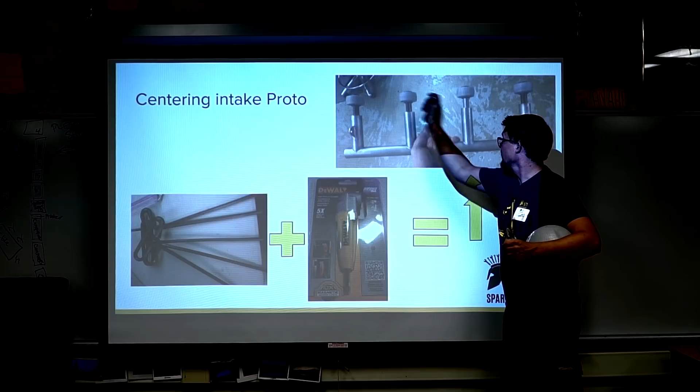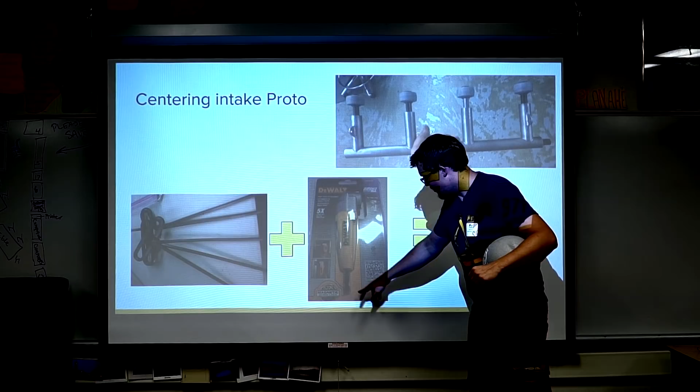The attempt was essentially roller, roller, roller, roller. I wanted these 2 spinning that way, those 2 spinning that way, and I wanted 1 motor to power all of it. So what I ended up doing was I bought some DeWalt right angle drives, which are just commercial off-the-shelf little things meant for getting screws in tight places. And that happens to have a 1/4-inch hex input and a 1/4-inch hex output. Already made for you. So I find out if I pop this apart, there's 2 little bevel gears in there with 1/4-inch hex through them.

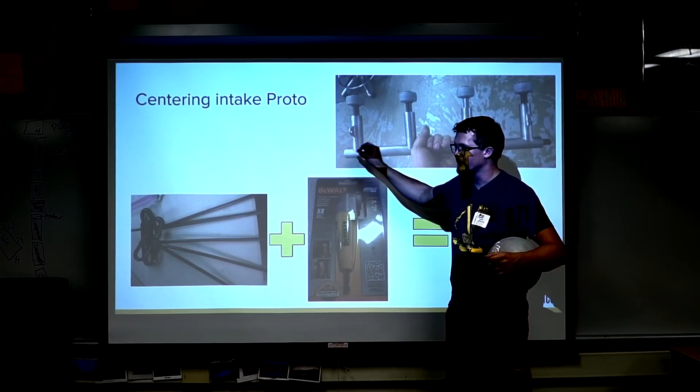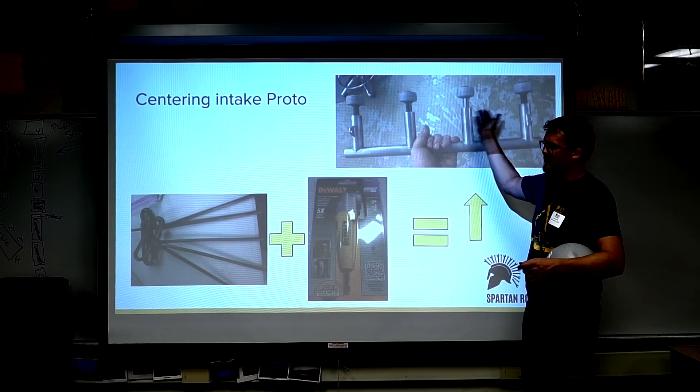So between those and those Allen wrenches, I was able to have 1 single back shaft that comes along this entire tube, and then 4 smaller stubby shafts, and then bevel gear set, bevel gear set, bevel gear set, bevel gear set, and I turn 1 axle at the end, and this is a piece of 1-inch steel tubing actually. So I was able to have 1 motor turning that, and this all runs. And it doesn't really take up much space, very tiny, very durable, because it's just thin wall steel tubing.

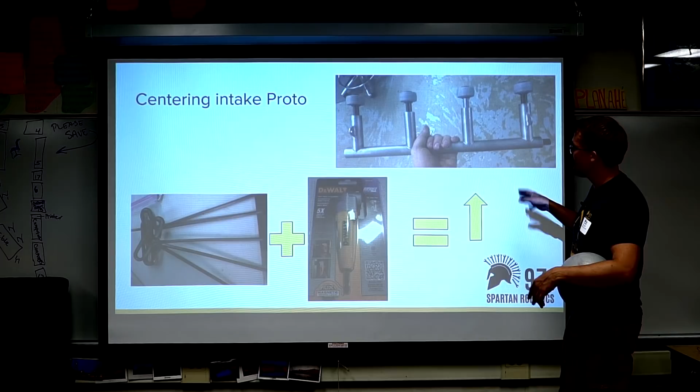This was a prototype that was pretty close to working, but it was too aggressive. It would take the ball, suck it to the middle, and then start spitting it out the bottom, just mushing it out the bottom. So that was kind of annoying to deal with. We ended up actually not using it at all and switching to a printed spiral roller and letting the ball rotate, which is much more similar to the vectored intake wheel setup this guy has.

But it was basically a creative application of off-the-shelf components as far as product availability. The NASA Lunar Mining Competition thing I mentioned earlier, we had one instance, it was a couple days before leaving for competition. We were doing some testing, and we had a 7075 1/2-inch hex axle just bend on us. And it was a more significant cantilever than we would have liked, but our options were limited, and we couldn't find where to buy any 4140 hex, a steel hex, anywhere.

But we ended up at a hardware store wandering around grabbing some tools before leaving on our trip down to Florida for the competition, and another teammate pokes me on the shoulder and says, "Hey, you know where you can get some steel 1/2-inch hex?" and points at the shelf full of the giant 1/2-inch T-handle Allen wrenches. And it's like, okay, you're right. And then went and made an axle real quick out of an Allen wrench. And zero problems, worked great.

All right. So looking for existing things, like, industry has solved many things for you and also has made many things available in further along states than just raw material. And that's an example of applying some of that. So some of you saw me driving around a silly little go-kart earlier. This was actually a thing I did for the very first one of those I made. I wanted to have a 2-speed. And part of this, that competition has you operate at a $500 budget, so you need to keep track of what you do use.

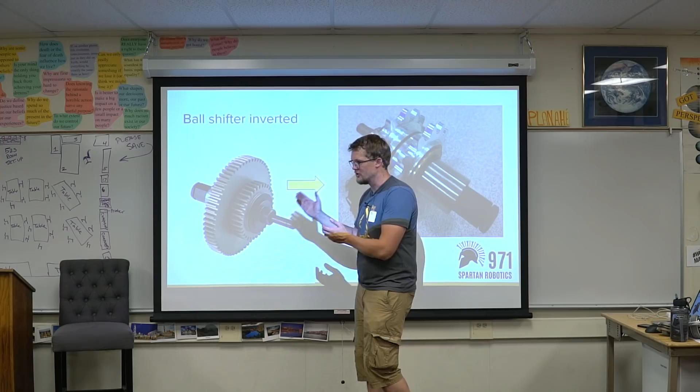But the product on the left is a thing I actually helped develop at Vex as a ball shifter cluster. So it's part of a standard off-the-shelf 2-speed ball shifter. So how this works is there's a central plunger, and then there's a set of balls that engages this gear, or you push it and it engages this gear. So you pick between those two. And typically the motor is up above, driving a gear coming down through here, and this is the output of this system. The shaft picks which gear to drive, and that goes down to your drivetrain.

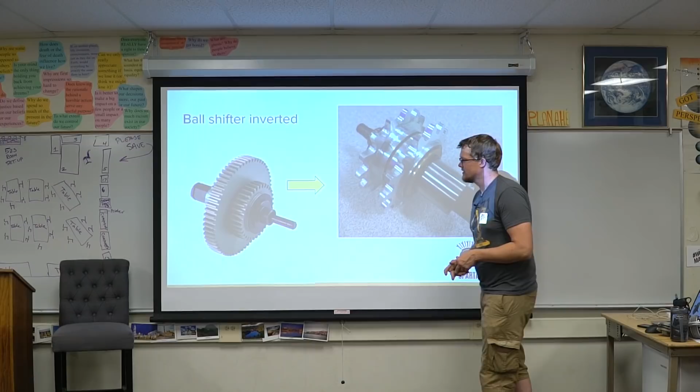In my instance, I wanted to have 2 chain runs going to my back axle, and I could just use a bigger sprocket and a smaller sprocket for my 2 different speeds. Now it was really cheaper to make because I could just machine them myself, or even buying plate sprockets is a lot cheaper. And also more flexible with regards to swapping them out quickly and not having to worry about center distance changes. So in this instance, I took these existing gears, popped them in a CNC machine, and made them sprockets. So I now had a ball shifter shaft where the output was now the input, and I had 2 chain runs to my back axle.

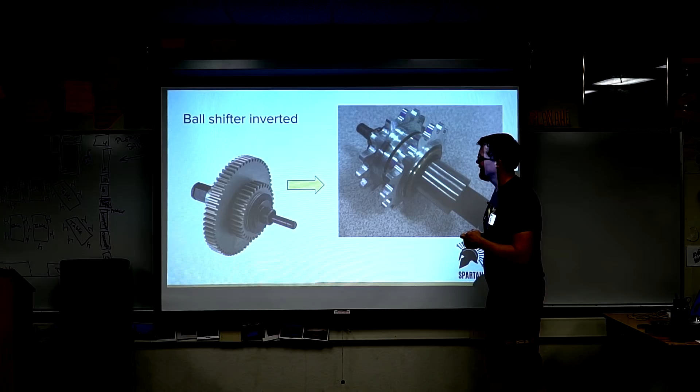And that one actually ended up having some problems with regards to shifting under load, because for FIRST Robotics robots, you are accelerating forward and reverse a lot, so you often have some dwell time, so shifting is not that big of a deal. But when you're accelerating hard and wanting to shift, you need to release that system from load and get things lined up in order to go. So mechanically it was fine, but during actual operation, getting it to engage cleanly at that speed was really hard. So I ended up using a different method I'll get to later. But just another instance of repurposing an off-the-shelf thing as opposed to starting from scratch.

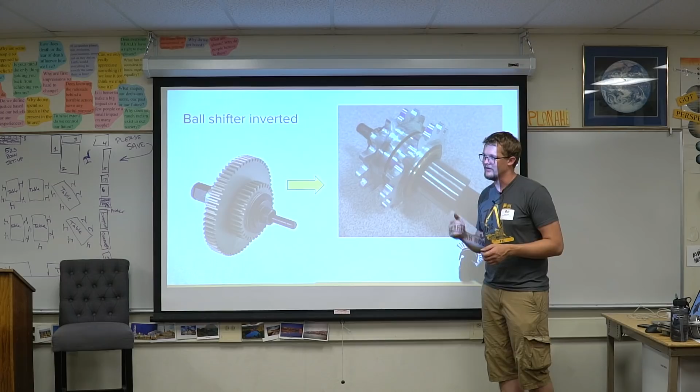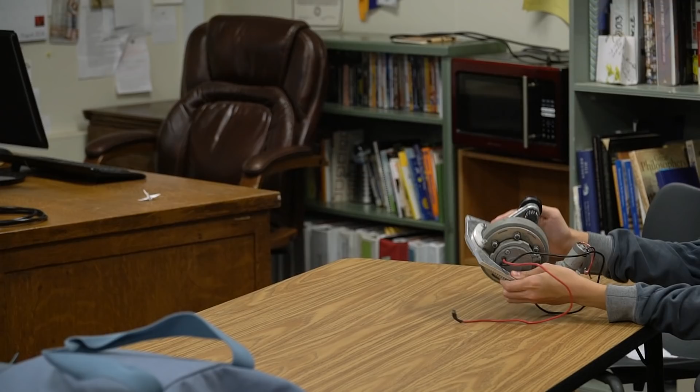I'll pass this one around up here. Play with it. Who knows what a swerve module is? A couple of you guys? So if you get a kit of parts chassis in your kickoff kit, it's a 6-wheel drive tank drive, which is referred to as a differential drivetrain, essentially. Because the output of that system is right side, left side, you have 2 degrees of freedom, and then you get translation and rotation. If you want to drive forward, both sides drive forward, backward, spin one the other way, you spin in place.

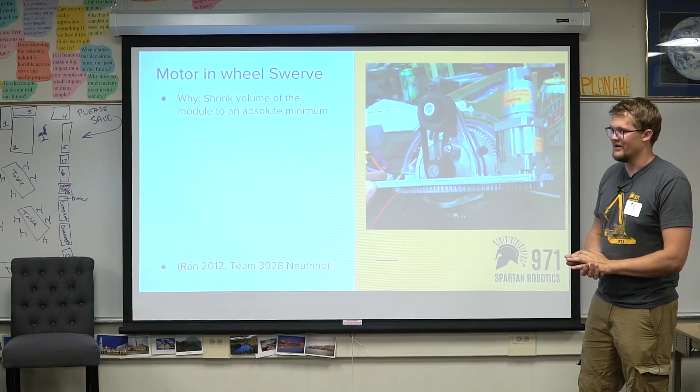In the case of swerve drive, you end up putting some number of these modules on a robot, but all your wheels can turn independently. So you can do all sorts of fun stuff like driving a straight line while spinning, sit there, point sideways, and drive sideways. Lots of options are available. This drivetrain's been around since like 1999 or something, but often it was a fairly bulky assembly that took up a lot of space. And 2012 was the first year of Team Neutrino, so we were rookies actually. And we're stupid and went for something creative and fun and built this module. And I posted this picture on the internet, and it took people a fair amount of time to realize where the motor that drives the wheel was.

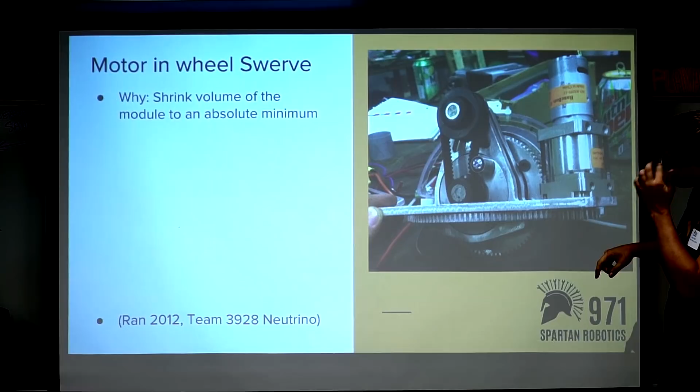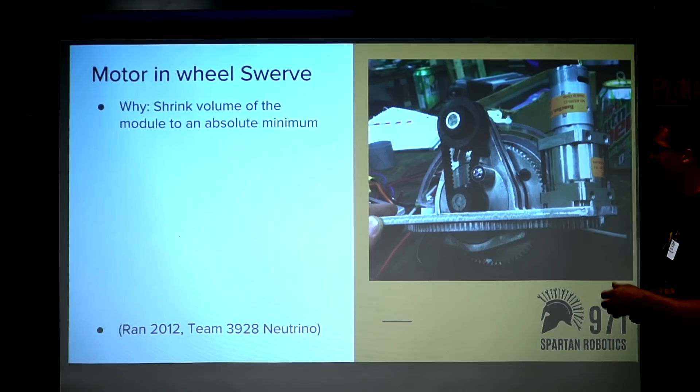And it took people a while to realize that this right here is the exposed face of a CIM motor. But basically what this enabled was everything was much more compact, and there was less stuff, so it also ended up being significantly lighter than many of the other modules. It had its own pitfalls with regards to manufacture, as far as some additional complexity, but it basically shrunk everything, because that robot was actually, I think, 7 inches tall, and for the most part fit underneath the bridge that year, for anybody who's familiar with 2012.

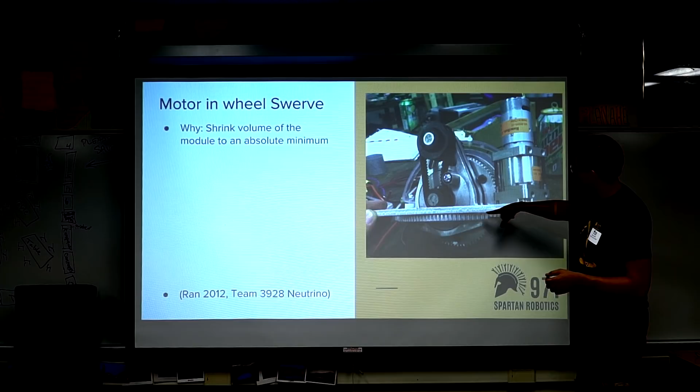But in this instance, there was a CIM driving the wheel, and then a little BaneBots 395 through a gearbox over here for steering that unit. The most creative part of this module to me is not the fact the motor's inside the wheel. It is actually this tensioner.

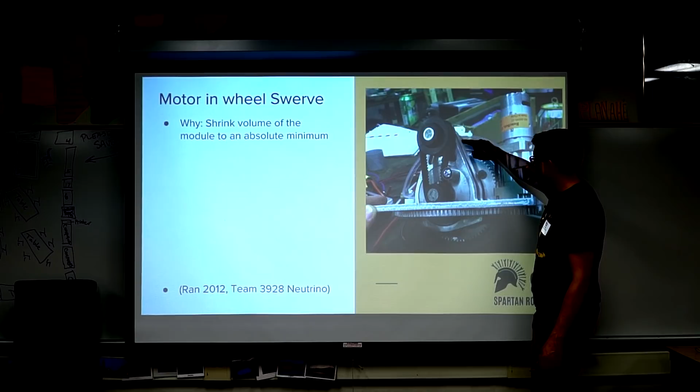So we were faced with a problem. We had a belt run here, and we also had a gear run back behind it that were both in the same center. Gears aren't really flexible. You want them to be at a fixed center, and you can't just adjust them up and down. So I needed to tension a belt, but I couldn't change my center distance spacing, which is what's most commonly done in FRC. So I needed to put a tensioner in from the side of the belt to push on it.

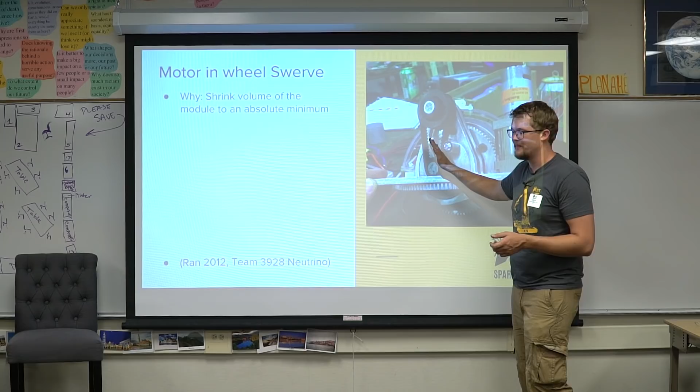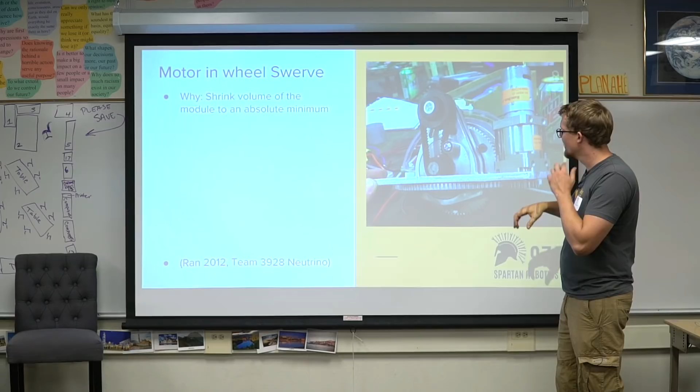So in this instance, we were able to solve this problem by adding a screw and 3 bearings, completely off-the-shelf parts, and the module also had a clamp. So I took one of the standard mounting screw holes in the face of the CIM, put a screw and bearings on it, and then if you look at the back side of the module, there's just a little shaft collar type clamp on the CIM. So you'd loosen that clamp, rotate the CIM until the belt's nice, lock the CIM down, done.

So we were able to get functionality for very, very little. Like, I didn't have to manufacture anything new. There was no extra package out here that increased my swing radius. It was just the simplest little thing, and I think it's easily the most creative part of this entire module.

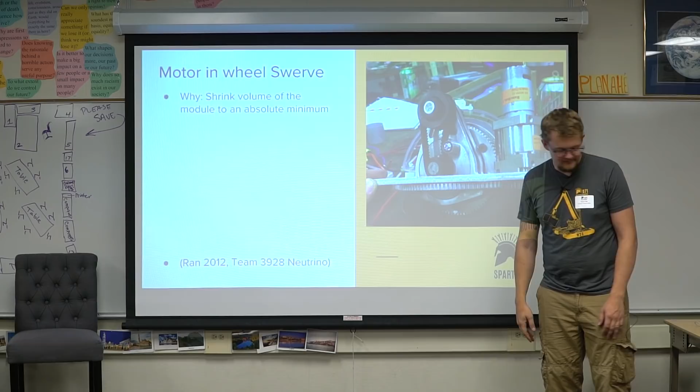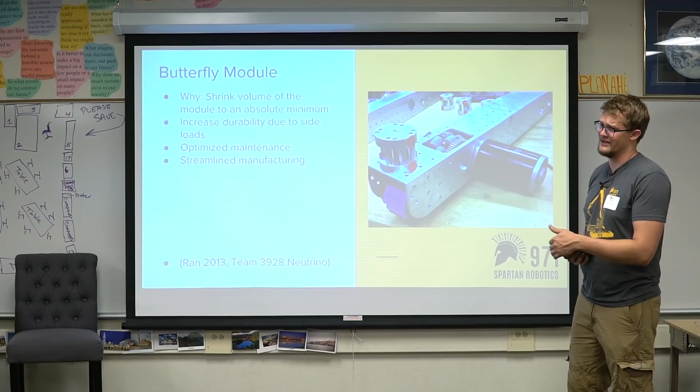So another fun one. I don't know who's familiar with a butterfly drive. Okay, I got one of you. All right, so 2013, the year after the swerve, we went, okay, let's go a little simpler on the drivetrain, but still not what we should do. So let's still do something else fun.

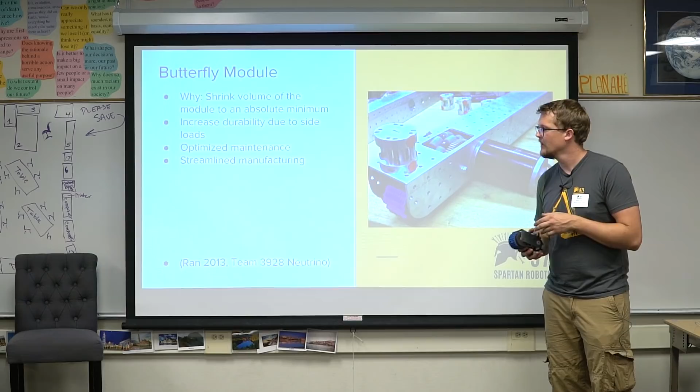A team that I was later actually on, 148 in 2011, did what's known as a butterfly drive, which is essentially 4 omni wheels and then 4 traction wheels, and the ability to switch between the two. We decided we wanted one of these, but the existing modules that 148 had made were very substantial in size and had some durability issues.

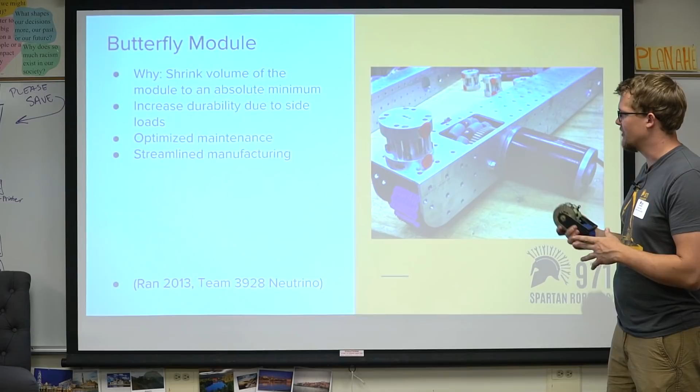So we wanted to make our own, but we wanted to match it to our manufacturing capabilities, which were different than theirs. They had a very advanced sheet metal shop that would crank things out and made it largely transparent. We had a whole lot of manual and some CNC machinery available. We wanted to optimize it for maintenance if it ever needed it, and we wanted to streamline manufacturing to match our expectations. So this module, the creative approach here was essentially, what do I actually need?

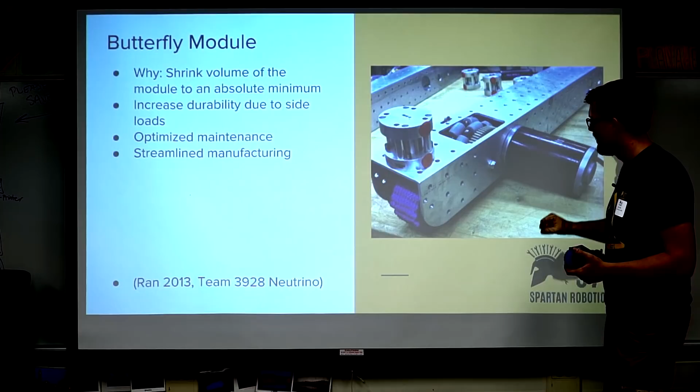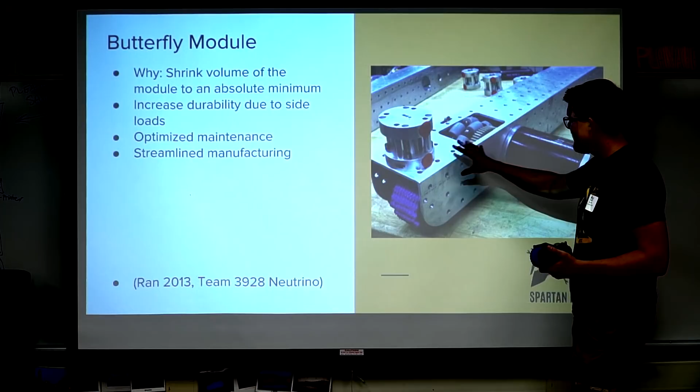I need power for each side, so I had a motor. I had an omni wheel, I had a traction wheel, and I had an actuator to switch between the two. I needed a gear reduction between my motor and my wheel, and I also wanted this guy geared even lower, so in traction mode I had more pushing power. So effectively it gives me a 2-speed too. But if you look at it, you realize if you take any single one of these parts away, the system doesn't work. There's no superfluous parts.

So in this instance, we had to manufacture a lot of parts. All the parts are pretty simple two-dimensional parts, nothing crazy. There's one more fun part here with CNC because we could and had the ability to.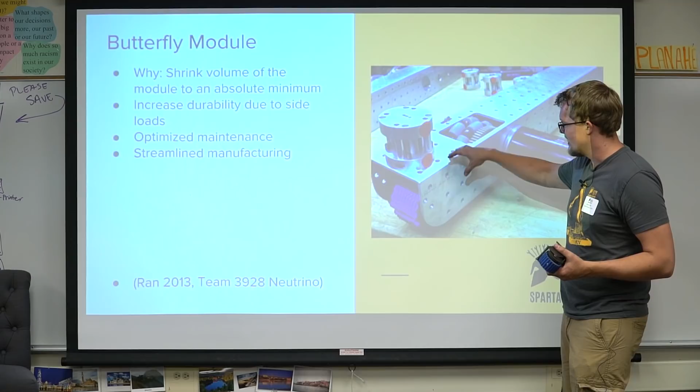But we also managed to take this whole thing and house it inside a piece of 3x3 tubing, so I could just buy a piece of tubing as opposed to making it have some sheet metal frame around it. And that simplified some things, and then it also supported the module. And one of my favorite parts from the optimized maintenance perspective is in order to pop one of these modules out, you popped a spring off on this little tab, and you pulled a bolt out, and the module dropped out of the bottom of the robot.

We had one instance where people are coming around in the pit, and our demo module was with another person, and somebody wanted to see one of our modules. So I turn, pop out my pliers, pop off the spring, pull out a bolt, pop one out of the robot, show it to them. And they're staring at me like I'm nuts, because I just took apart my robot to show them a thing. And then popped it right back in. Like, it was that simple to pop it in and out.

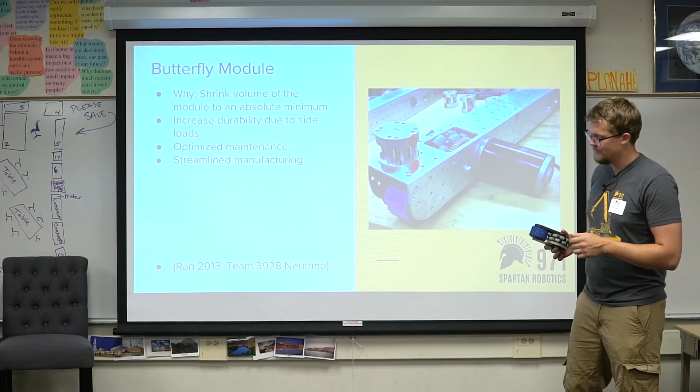I'm pretty happy with how it happened, but this was an exercise in distilling it down to what you actually need and how compact can it really be. So I'm going to pass that one around too. Another fun thing about that one, the side plates of that module are 1/8" steel plates. As many of you know, steel is not a very common material in FRC.

I actually got some ribbing from my coworkers down in Texas, the originators of the butterfly drive, about my heavy steel side plates. To shut them up, I went and opened their CAD model, opened the custom fancy sheet metal aluminum enclosure around the module, isolated it to just that, mass properties, all right, weighed the exact same. So I was using steel from a durability perspective because it was very small and I had some concerns. But I used less of it and everything was smaller, so it was a wash and they stopped giving me crap.

So the lesson there is more just like, you're allowed to question things and use other materials. Like a lot of stuff happens on autopilot in FRC.

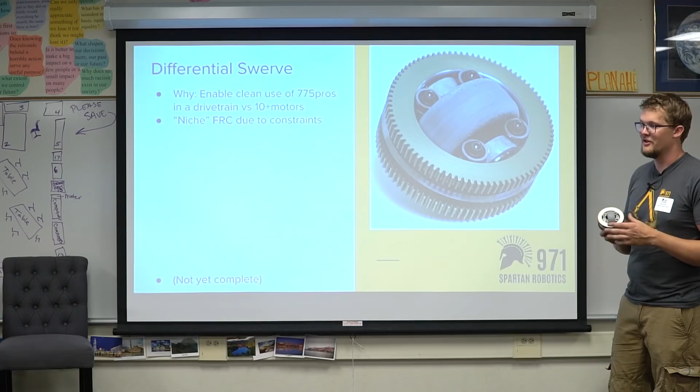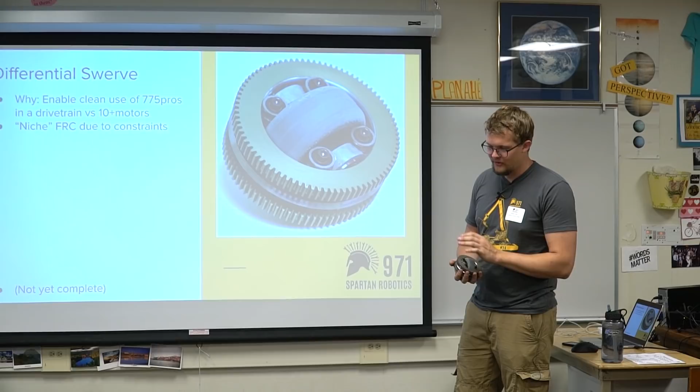So this one's not done yet, but it's been a very fun one. And this is another thing, solution to a problem nobody really has. But I decided one was there, so I started poking at it. So in FRC, you have a power distribution panel with 16 spots on it. You have a limited amount and type of motors you're allowed to use. They started making unlimited recently.

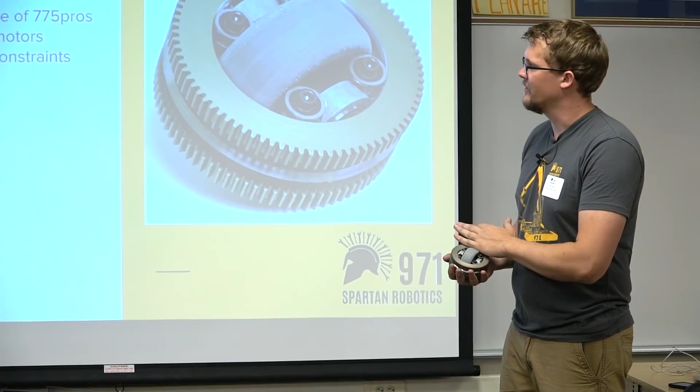But there's a motor called the 775 Pro motor, which I worked on at Vex, and they're very powerful motors, but they don't have much for thermal mass, so they don't handle abuse very well. So drivetrains are classic high abuse points. So in this case, I went, okay, if I wanted to do a swerve, I would like to make it tiny and light and not use a CIM.

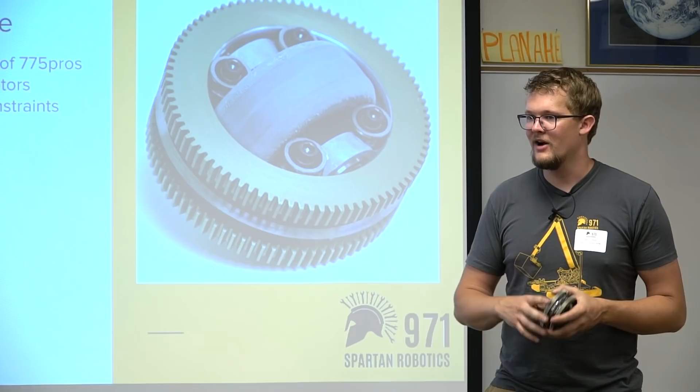Like, if I could figure out a way to use two 775 Pros per module, that'd be 8 on my drivetrain, I'd be great. But if I were to do that on a conventional swerve, like the one I passed around, there'd be 1 motor powering the wheel and 1 motor steering. So the 4 driving me around are taking a lot of load and not sharing it very well.

You know how I described earlier the 6-wheel drive tank drive is referred to as a differential drivetrain? If you take both motors, drive them the same speed, same direction, you move in a straight line. Same speed, opposite directions, you spin in place. This module is purely that, contained mechanically.

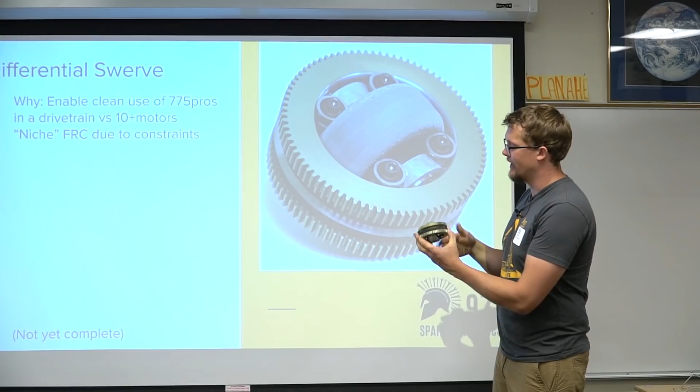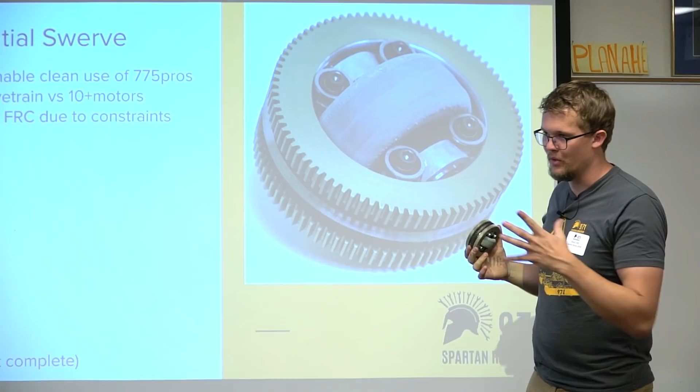So this would essentially let me take both of those motors and have both of them delivering most of their power to moving my robot across the field. So I split my load up among 8 775s, and that seems reasonable.

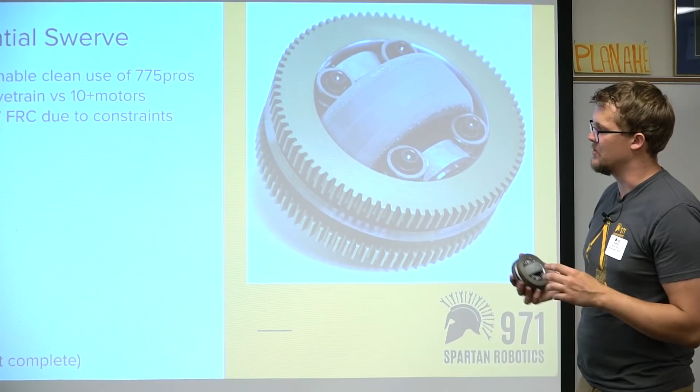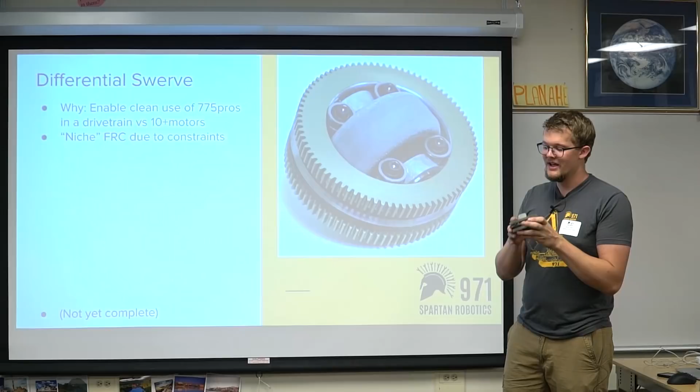We have not yet finished this guy. We got distracted by some other things. But you can picture this module with 2 775s next to it, and that whole thing is about yay big and will probably weigh like 4 pounds or 5 pounds. And then you have a drivetrain that takes up next to no space, weighs very little, a lot of room

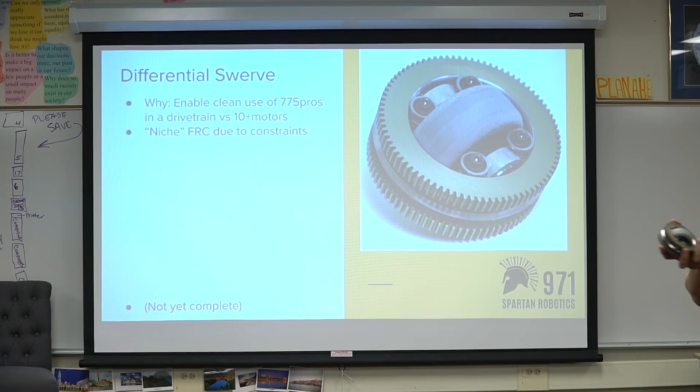for other activities. And there's some details in this one that help minimize part count, because once again, if you notice, you take away any part of this, it doesn't work. It's distilled down to only what's needed. So, all right.

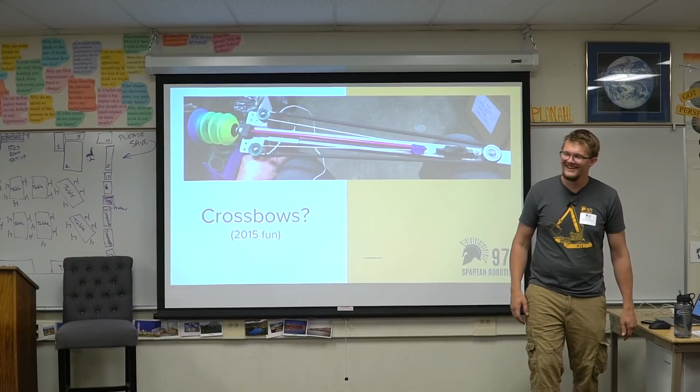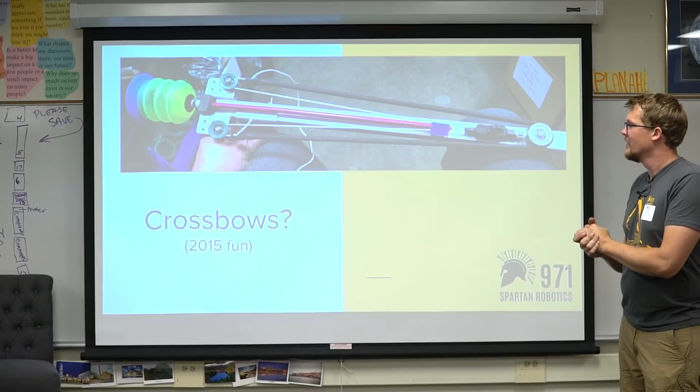This is one of the farther off the wall ones. So, anybody not familiar with the 2015 FRC game called Recycle Rush? Effectively, there were 3 robots on each side of the field. There was a border in the middle. You couldn't go from one side to the other. And there were a couple of game pieces that started in the middle that were large recycling containers.

And so if you wanted to win at higher levels, you needed to grab those and bring them to your side, but you're racing somebody to do the same on their side. So it's a game of how fast can you get 2 recycling containers and get them back away from the other people. A couple days before Champs, I decided I wanted to build some suction cup crossbows, because why not?

And in this instance, the solution to this problem is essentially, if I'm sitting there behind a line, there's some trash cans over there, and I want to get to them, it's effectively how much energy can I put into something, and how light can I make it. If I have a car and I want to go faster, one option is take out weight, because then I accelerate faster because I have less stuff to get up to speed.

So in this instance, I was looking to minimize weight, so I had a suction cup and an actual crossbow bolt. This is where I don't reinvent the wheel. So it had the same little tang on the back and everything. I took some Vexpro parts and then some Vex EDR parts, actually. And then this is spear gun tubing, because there's already a commercial off-the-shelf thing out there that does this. And I just went and used it as well for launching spear fishing.

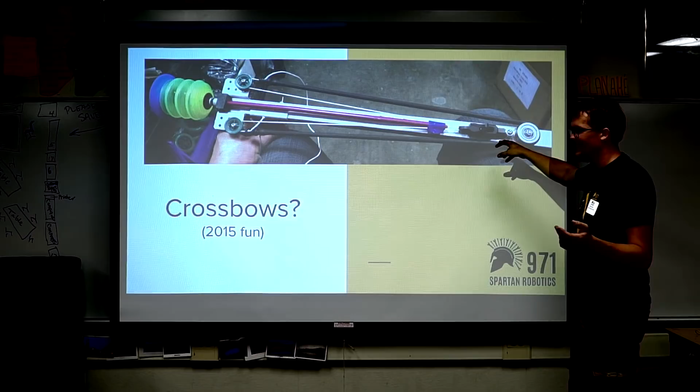And then I went, how am I going to release this quickly? Oh, hey. People have already solved that too. Here's an archery trigger. Just went and bought that too. Like 20 bucks at Bass Pro Shops or whatever. And then I ended up having a little electromagnet set up to pull and release that. So match starts, 3, 2, 1, ka-chunk. Fires 2 crossbows into cans. And they're really hard to get off.

It ended up getting stuck on a 4th robot, a backup bot for an alliance, in another division after we were out. But they got knocked out before it saw the field. But it still existed, and it took like 2 days to make. Because this was actually all mounted on a little ball and socket camera mount.

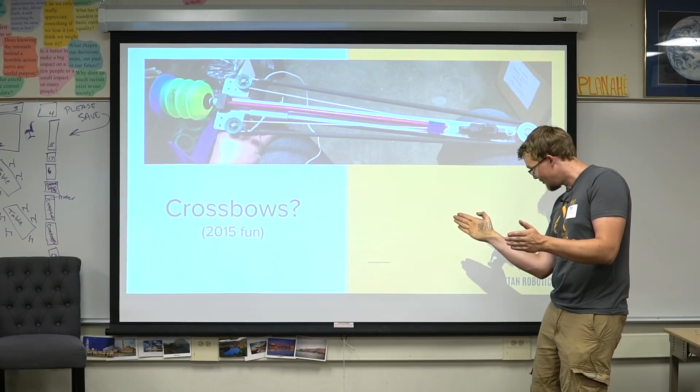Like I went on Amazon and bought a camera positioner in order to mount this on, so you could set down the robot and then aim them individually and lock them down. Because someone's already solved that problem too, rather than doing completely custom brackets. So.

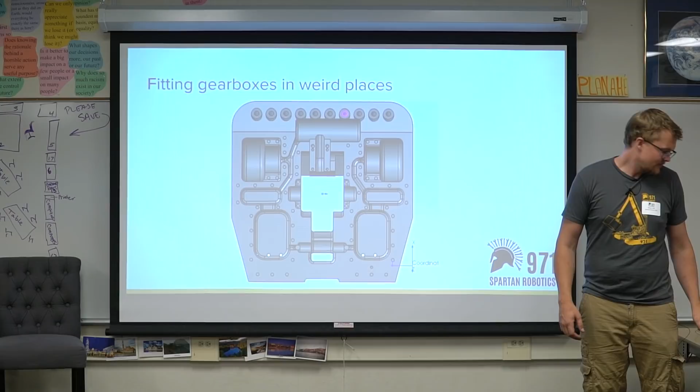This is a fun BattleBots related one. I was working on a prototype, and it was basically another creative solution born to constraints. In this instance, this is the bottom of a single piece billet chassis. So FRC, used to bolting a bunch of metal together to make a chassis to a robot.

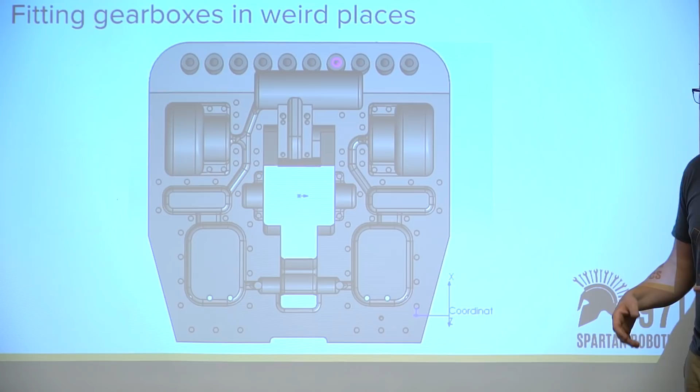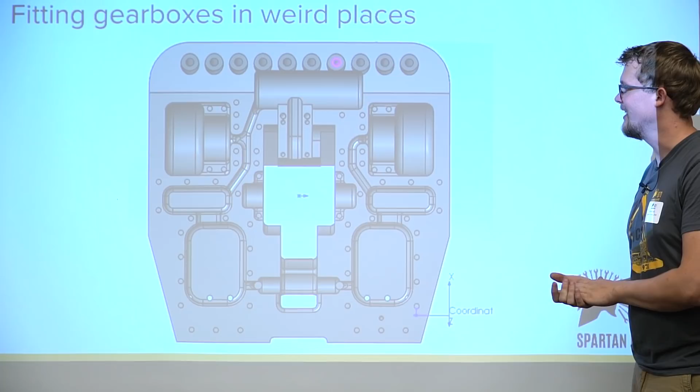In this instance, this was made out of a 20 by 20 by 3.5 inch thick solid piece of aluminum, completely milled out. You need to be really durable for BattleBot stuff. And turns out making a brick works. But in this instance, I had cavities for the bare minimum of stuff. So I had batteries, speed controllers, wheel, and then my central launcher mechanism, which was a choo-choo, for anybody familiar with that from FRC stuff.

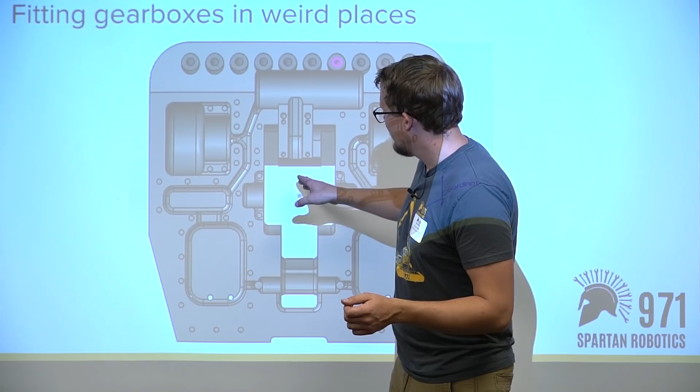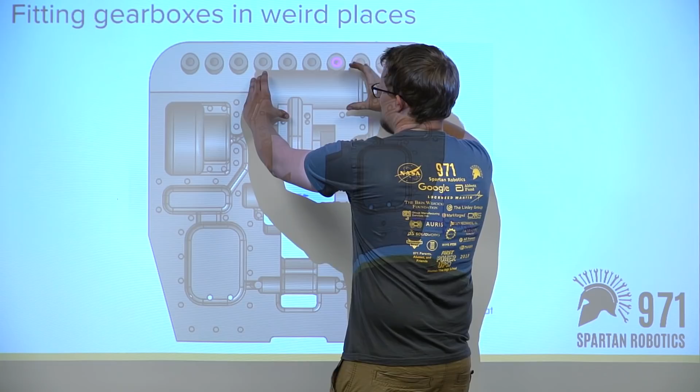And on the choo-choo, I had a sprocket here, and then a sprocket here, and then 2 smaller sprockets. So I needed my power output here, but I only had this space for motor and transmission. So typically, if you are on a robot, you have a motor, VersaPlanetary, output. It's motor, gearbox, output. If I were to do that same setup here, it'd be motor, gearbox, sprocket. A sprocket there doesn't do me very good. I need it here in order to fit into the middle.

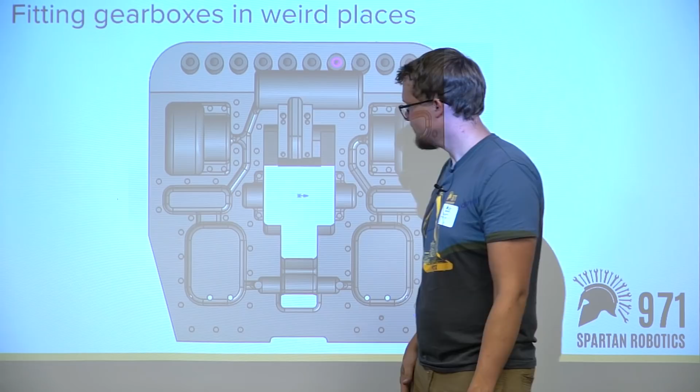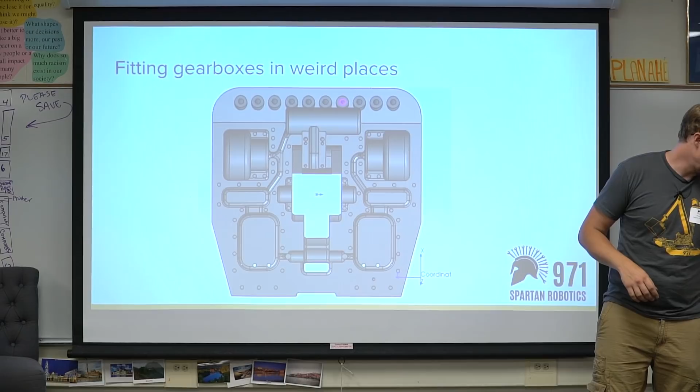So this was effectively a packaging problem of, I have a motor, I think I needed like a 16 or 28 to 1 reduction territory. It was a 2-stage planetary I really needed. And then I had 2 chain reductions after that, but I needed the output in the middle of the gearbox pretty much. So this was a fun one and took a lot of pondering, but I did find a solution.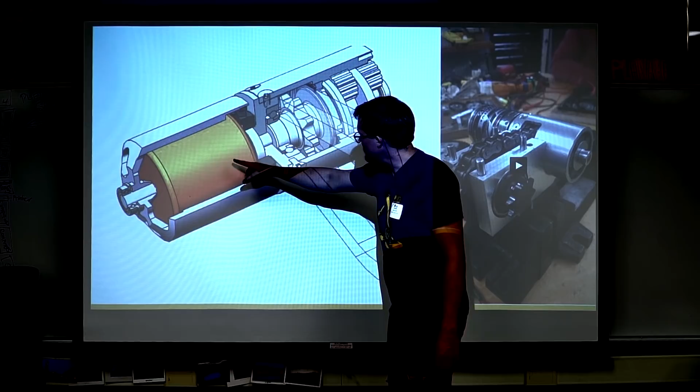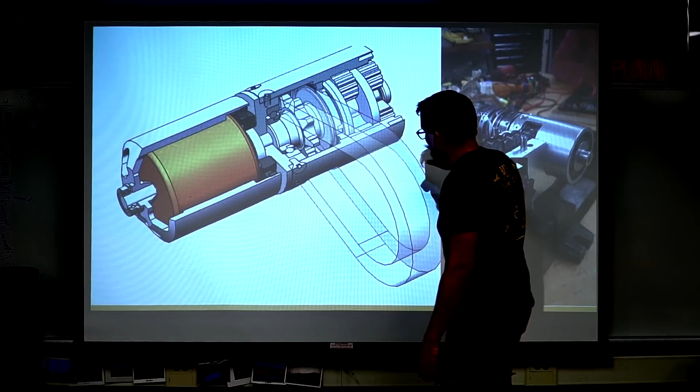In this case, this is a hobby brushless outrunner motor. There's a motor shaft down the middle, and this shaft actually goes through everything. There's a sprocket, there's a planetary stage, there's another planetary stage. So the shaft on this motor goes straight through, and then the sun gear powering the planetary is on it. So then it powers this carrier, which then goes to this sun gear, which has a hole through it that this is all clearance on. And that powers this guy, which powers the sprocket, and the chain comes out the side. So I have a motor, a gearbox, and my output just flipped from usual.

And guess what? This arrangement is used elsewhere in life. So that's just a little video of it going. And the input of the gearbox is over here, motor's over there. And then there were 2 more chain runs that came down from here to the final drive.

But turns out this layout is often used in electric winches on the fronts of trucks. They essentially want to have a big drum, and they don't really want a gearbox and then a motor all hanging off one side, because people like symmetry. So if you're staring at the front of a truck and you see a giant thing coming on one side and then a spool and then nothing, it doesn't look good. So a lot of them actually ended up coming up with motor, shaft through the middle, gearbox back the other way, winch drum, and same thing. So in this case, I just packaged it with my stuff, but the layout existed and worked out.

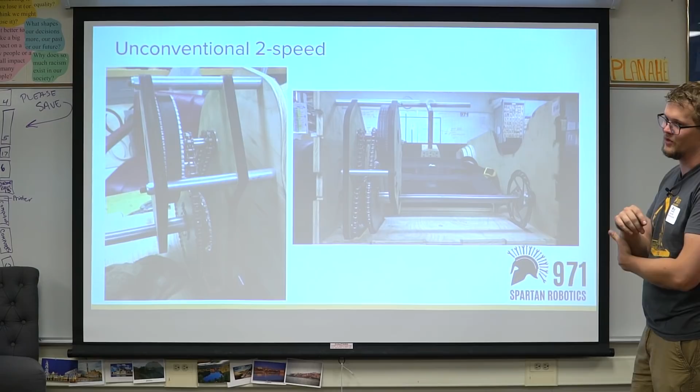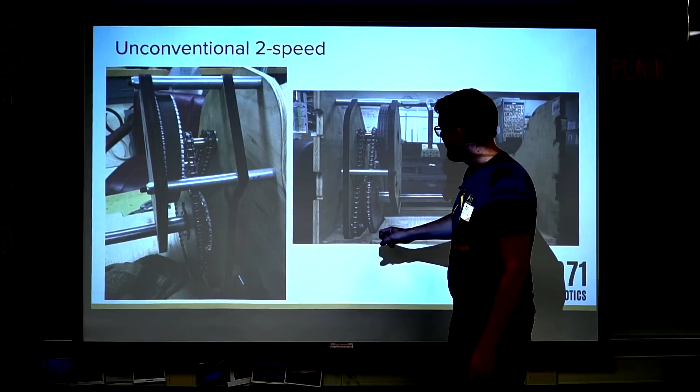So that 2-speed I mentioned earlier didn't shift very well. I wanted one that I could shift under load with no problems. So the pictures could be a little brighter, but if you notice, there is a pulley here, so a motor would mount here. There's a solid shaft across the top, and there's 2 chain runs. One of them is conventional, and it's 2 sprockets with a chain around the outside. The other one's a little funky, because it comes around the top, but then it comes around the opposite side of that sprocket below. And then there's an idler here, and then it goes back around to the top up there. So it kind of looks like a weird L. Both of these bottom sprockets are on ratchets to the back axle. So this is a 2-speed transmission.

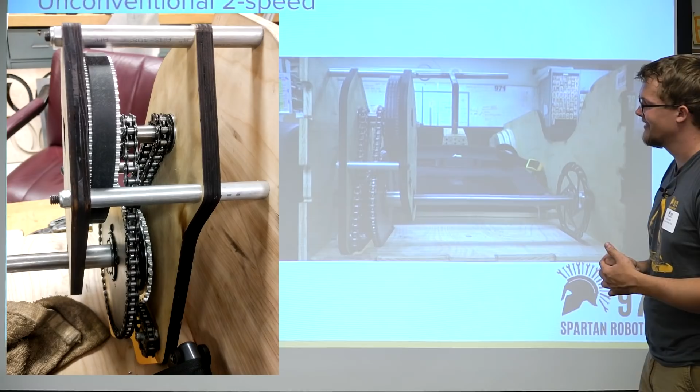With what I just said, can anybody besides Brian tell me how it shifts? And you, Steve. There's no extra actuator. This is purely just a motor driving this. Okay, so there's one conventional chain run, so sprocket, sprocket, normal chain run. There's another one where it's the same 2 sprockets, but then there's 2 more, so the chain comes around the top, around the other side of that sprocket. So from the one up top, it goes around this way, idler, idler, back up.

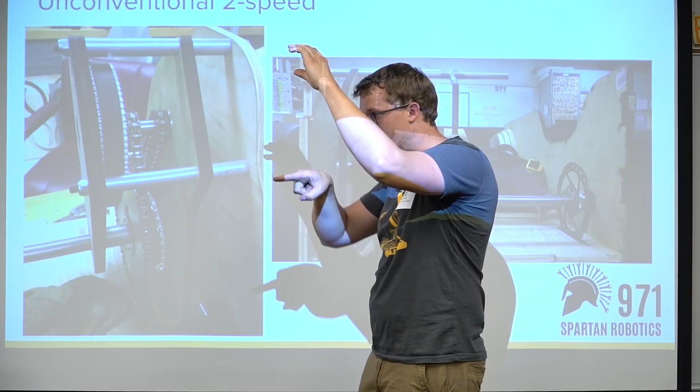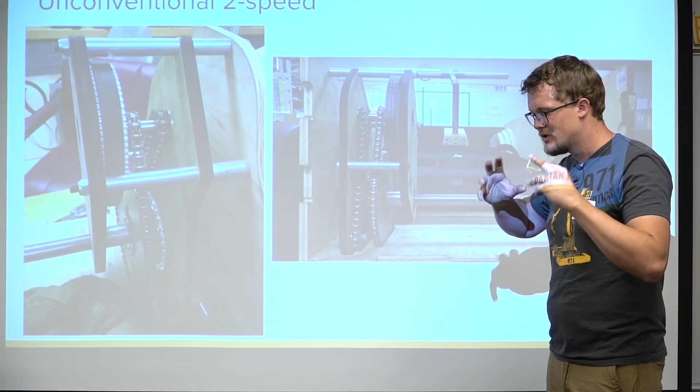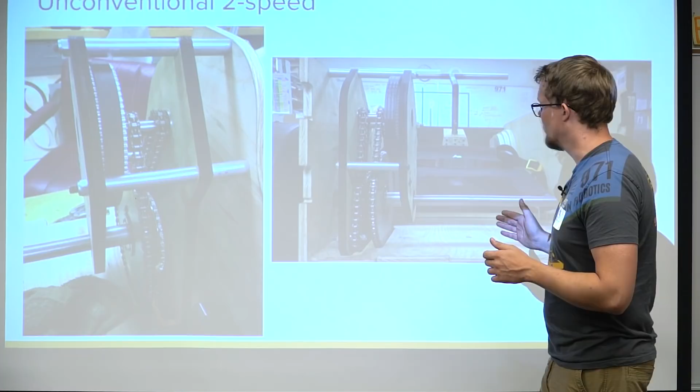Since both those sprockets are on the bottom, and one chain run comes around the normal side of its sprocket, and the other chain run comes around the opposite side, it means when you spin the axle on top forwards, one of those sprockets is moving this way, and one of them is moving this way. The 2 sprockets on the output are moving in opposite directions. And both of the ratchets go the same direction, so whichever one is rotating forward is driving the back axle. The other one's just moving backwards and freewheeling just like your bicycle.

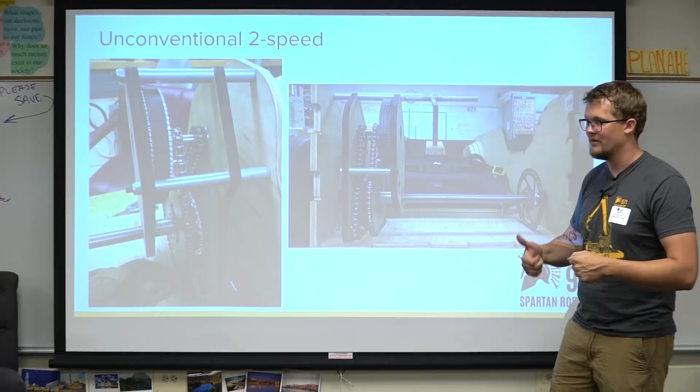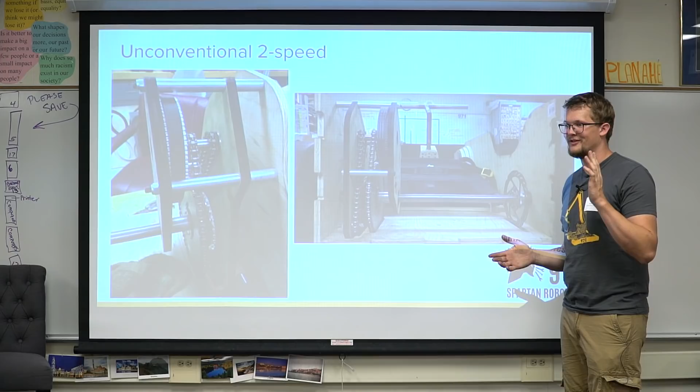So you shift the transmission on this thing by taking your motor and spinning it the other direction. So I'm driving full speed, push a button, motor flips the other direction. The motor's now spinning completely the opposite direction, but I'm moving that way faster. This works in a tiny go-kart because you don't need to go backwards. You shouldn't need to go backwards unless you stuff it into a wall.

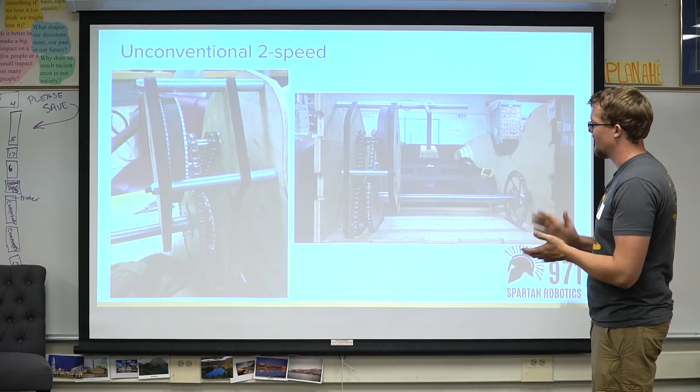But effectively, this gave me a free, very easy to actuate 2-speed transmission. And the biggest downside to it was if the cart's sitting there, you cannot push it backwards. Both ratchets lock and it pulls against both chains, and you cannot roll backwards. You have to pick up the back of the cart, slide it backwards, set it down.

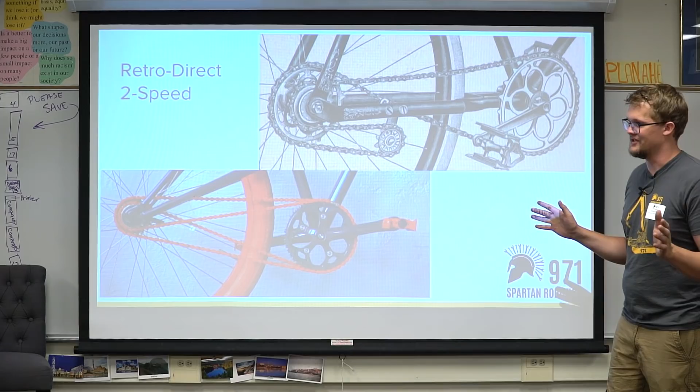But if you can take a guess, this has been used elsewhere, and it turns out it's 1930s bicycle technology. Before derailleurs were popular on bicycles, it was either single speed and then people trying crazy stuff. So in this case, it's a single chain run, but if you follow this chain run around, the top chain comes over the top of this sprocket, around the big guy, back, over the top of the other sprocket, up around an idler, and then back to the other side.

So a chain actually has some flex to it, so you can have things a bit misaligned and it works out. But it's a two-speed where you pedal forwards, you're in one gear, you pedal backwards, you're in another gear. It was made by a guy called La Hirondelle, but you can Google RetroDirect two-speed and find more details on that.

But it works perfectly fine for a bicycle, and I've been tempted to build one just to have it. But you don't need to roll backwards on a bicycle, so it works fine. And who really cares if you pedal backwards? Like, it's just weird to get used to.

And then this is a more modern take somebody did on it where they put two chain runs, but one of them they flipped, and you can't really see it, but there's a clear piece of plastic in here just to keep those two chains from directly rubbing on each other. But it's achieving the same thing of my funky sprocket runs on the other one. I just didn't want to have to run chains past each other and flex them out of the way.

So, 1930s bicycle technology. Still can be used for stuff. And it turns out the better solution is just to make your own motor controller so you can dump enough power where you don't need two speeds. Which is what we did later in the tiny van that I was driving around.

So, recapping some of the methods I went through there. I make sure to entertain almost all ideas. Monkey wrapped in tinfoil, still dumb. That comes from a friend of mine in high school who, that was all he ever said during design input stuff. But that means sometimes I'll catch people say, oh, never mind, that's dumb. And anytime I hear anybody say that, I'm like, stop and spit it out, because somebody else can have a good idea based off of it.

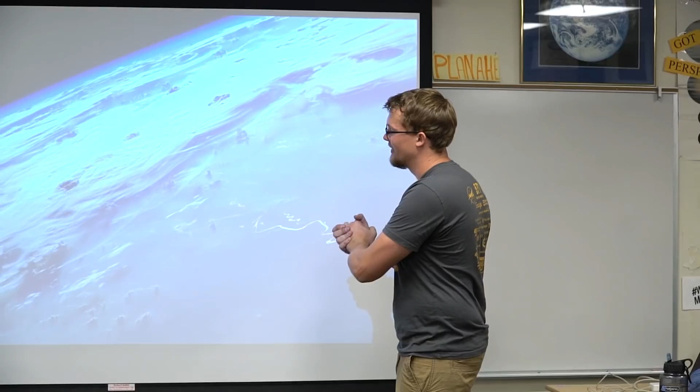Other questions? Yep. What's the name of your battle bot? Oh, sorry. Tantrum. It's been in 1 fight so far, and I got to fight a giant cheeseburger. Battle Royale with cheese. It had a spinning bacon blade and 2 large AR-400 buns. And the funny part is, I knew everybody on that team already, because the guy who started the Power Wheels Racing League was on it, and a bunch of other people who built Power Wheels cars were running that team. So I got to face them. Did you know the crazy people dancing in those mustard costumes? Yeah, that was them. Oh, that was? Yeah.

The guy who did all the graphics for that is the one who started the Power Wheels Racing League. So I actually saw a bunch of them a couple weeks ago in Detroit, because we loaded up 2 carts, shipped them on a pallet to Detroit, and competed. So there's a lot of entertaining overlap between things.